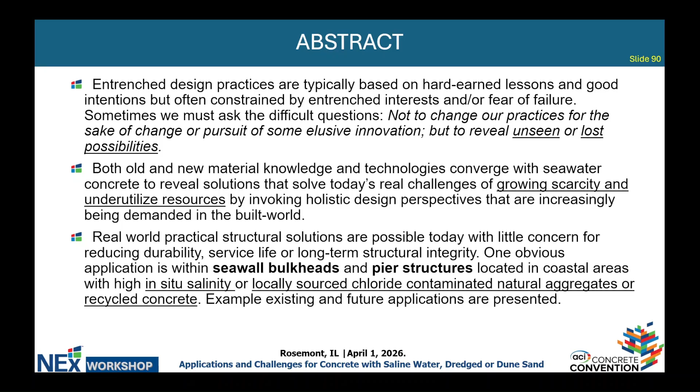I'm going to talk a little bit beyond Florida as well, so we'll get into it. But this is a pretty high-level presentation. At the end, we'll get into a few weeds, but I think this is an important conversation to have because the topics we're going to talk about, my abstract, you can look at that later, is we're asking for a cultural change from engineering.

We've been telling engineers for 50 years, keep the chlorides out of concrete. And now all of a sudden we're saying, well, you can put them in. And that's not an easy thing to convince an entire industry that is practical or even necessary.

And so we all, perhaps in this room, can see the benefits, see the potential, but that message really needs to be conveyed convincingly, not in a marketing perspective, but giving the reasons why we should do this and how we have done it, and potentially what strategies we might consider moving forward to safely deploy seawater concrete technology.

And so there's some work being done already here at ACI with the 243 committee and NEx. But I'm going to talk about a few tools that might be considered in the context more of transportation infrastructure and more specifically bridges. There's been a significant amount of federal research dollars given to state DOTs to pursue research on different kinds of innovative technologies.

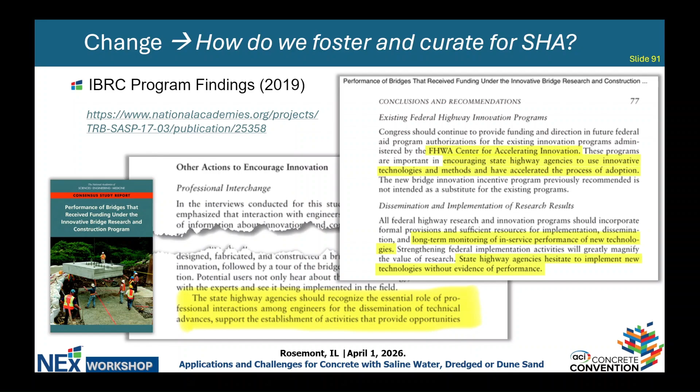And so there is guidance on what you should be doing, not necessarily how you fund it, through this report on the IBRC program to look at what were the effective technologies on the diffusion of those technologies, materials mostly, but some construction practices over time, and what were the lessons learned for what was effective and what wasn't. And so you can read later on the highlighted yellow stuff, or you can download the whole report if you're a little sleepy.

And, oh, you got my earlier slide maybe. Yeah, okay, all right. They couldn't find my presentation this morning at the Speaker Center. I'm like, okay, so I uploaded a new one and tweaked it, but not shown here.

But so we'll get to why would we want to do this? Well, why would we want to do this at Florida DOT? And so we have a mission statement, and part of that includes prioritizing protection of the environment and natural resources. Now, we're not pushing ahead with saltwater concrete necessarily, but in the context of water conservation and reduction in natural aggregate extraction from quarries and things, recycling of existing concrete, it makes a lot of sense under this mission statement.

And there is a plethora of resources out there. I counted over 200 that we're quoting or referring to in the 243 guide that's under development. Some of those relate to life cycle cost analysis, and some of those relate to life cycle assessment. And so some of those are environmental, some of those are economic. So there are a couple of compelling reasons why you might want to do this.

But that message has to get across to who? Well, it has to get across to owners. It's got to get across to designers. They have to be convinced they want to do that. They don't want the liability that might be associated with something that doesn't have a codified design criteria. We have guides, but the way we implement guides is, as an owner, we specify you use this guide, and then that sort of shifts the liability off that designer. And so at this point, we don't tell them to use seawater concrete.

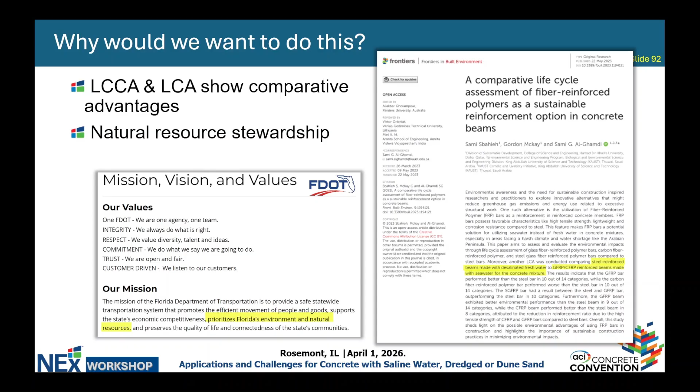And the question has now come back to me, is like, well, what do we do with those limits? And so the implementation is really founded on standards and specifications that you can point to that are endorsed by authoritative bodies, whether that's ACI, AASHTO, FIB, someone else. And so this is something I've been struggling with. We've spent probably 10 years looking at seawater concrete.

At the same time, or actually just prior to that, there was I think a very important NCHRP report that came out that looked at, sort of following on from the IBRC program as well, what were the effective strategies or the steps if you really want to institutionalize change. This is because the whole goal of the NCHRP program is to do research, applied research, and get it implemented. And so they looked at, well, what works and what doesn't. And so I think there's 10 steps in there. I'm not going to bore you with them today, but we actually looked at that back in 2016 and created a roadmap and said we should be doing this, this, and this. And I don't know, something happened. And it's still out there, but we're sort of focused in on some specific goals right now.

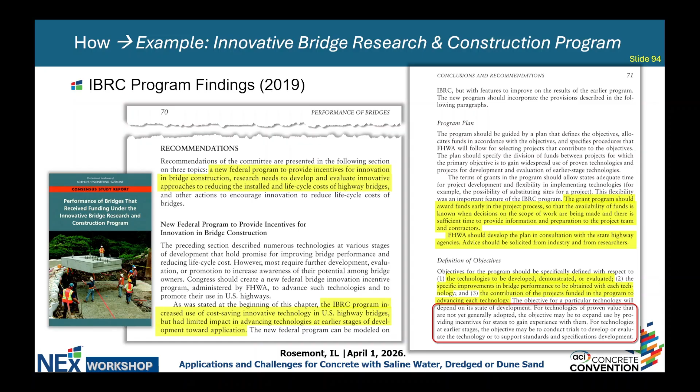But the bottom of that slide in the red box, something else extracted from the IBRC review, was focusing on the importance of standards and specifications. Pretty boring, I know, but it is essential that you can point to something authoritative and say, use this, or a contractor might propose an alternative material on a project, and they're like, well, what tells you that you can use that? And it might seem pretty obvious, but it really isn't in practice being executed. And so that's sort of the high level part of the talk.

I'll dig down a little bit on, so when do we do this, specifically seawater concrete? Well, we've already done it a little bit in Florida, thanks to collaboration with the University of Miami and some other partners. And so we have pre-stressed piles, which is our logical choice for seawater concrete because they sit in seawater. And I don't know if we get to the point where we would routinely use this necessarily at a state level, but there have been some private projects where they didn't want to use pre-stressing necessarily,

and so it's just reinforced GFRP. The reason why we put pre-stressing in piles mostly is when you drive them, you crack them pretty severely, and so reinforced piles don't really work very well. But you can have non-pre-stressed piles and drive them gently and really get an effective product in the end. And then if it's non-corrosive technology, then you're not so worried about cracking under service or pre-existing cracks, which, believe me, we have loads of pre-existing cracks on pre-stressed piles that we didn't know were there. Well, out of sight, out of mind generally is the case until something bad shows up.

And so the point, I'm not trying to promote FRP necessarily, but I'm saying if you're going to use seawater in your concrete, then you're going to create a potential risk for something to happen. And if you have a reinforcing system that mitigates or obviates that risk, then that helps everybody sleep easier at night.

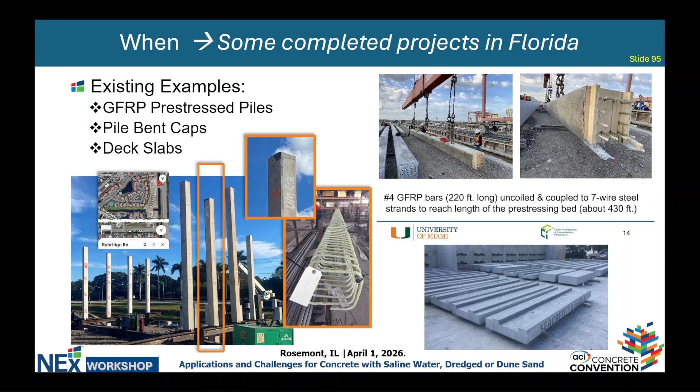And so under the innovative i-Dock project, there were some precast elements. There were some leftover components that were kindly donated to a contractor. They put them on a private bridge. And so we've got some things scattered around the state that we're struggling to track the long-term performance, which is another part of innovation deployment, is having monitoring, and who pays for that, right?

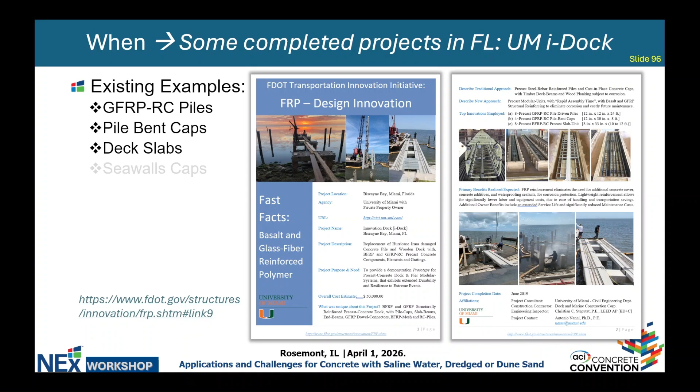So drilling down on the i-Dock project, this has been documented in some published papers and a number of presentations, but we had precast piles, precast bent caps, precast decks, and those were all made with seawater out of Biscayne Bay, I think, in Miami.

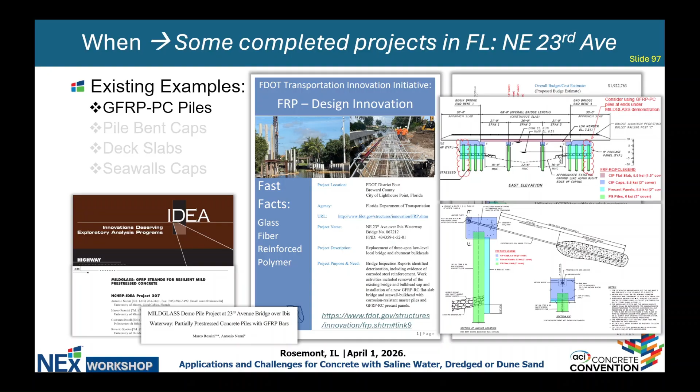And then we had a parallel project where we were replacing a bridge in southeast Florida, and we had some seawalls that flared out from the end, and Tony offered us a couple of piles to use as a demonstration, so we were able to substitute the least critical piles on that wall, I would probably say, with seawater pre-stressed concrete piles, and so those will be monitored in the future, but with no dedicated funding. And so this seawater concrete was also used on the Halls River Bridge cap, and there'll be a more in-depth presentation on that at the end of this morning's session, I believe.

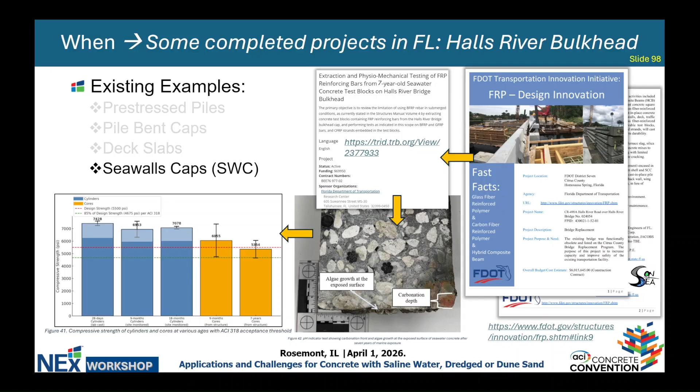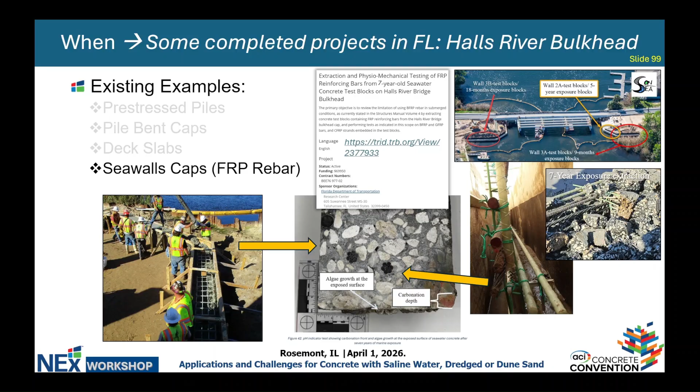And then just closing out with the Halls River Bridge project, we have carbon bars, basalt bars, GFRP bars in seawater concrete that we have extracted at 9 months, 18 months, and 7 years is the latest. It's not quite published, but that's what we're talking about. And so here's an example of the construction through to an extraction after 7 years in the middle on the right there. It's difficult to pull out full-size bars that you want to test and do a full tension test, but we've done it a couple of times, and I think there's some valuable information that's being shared, and I look forward to that report coming out.

Again, to the question in the last presentation, degradation in the alkali. This was combined alkali and chlorides, and so typically, depending on the product, you may get 10 or even potentially 20% long term. And so our reduction factors in design, slightly different from AASHTO to ACI, are intended to account for that. And I think that's it.